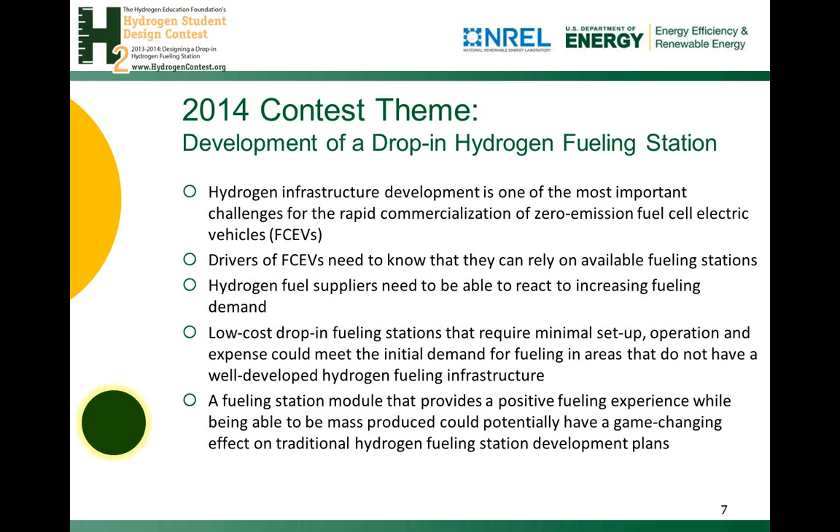One approach is to avoid that early drivers will be limited by range, by the lack of infrastructure, by developing such drop-in fueling stations that allow greater range in areas of low penetration.

So we'll see what drop-in means. It's that stations should be easily transportable to another location once demand in the area is large enough to justify an investment in a stationary fueling station. Furthermore, they should have comparatively inexpensive costs to be built in great numbers and require low maintenance and easy permitting.

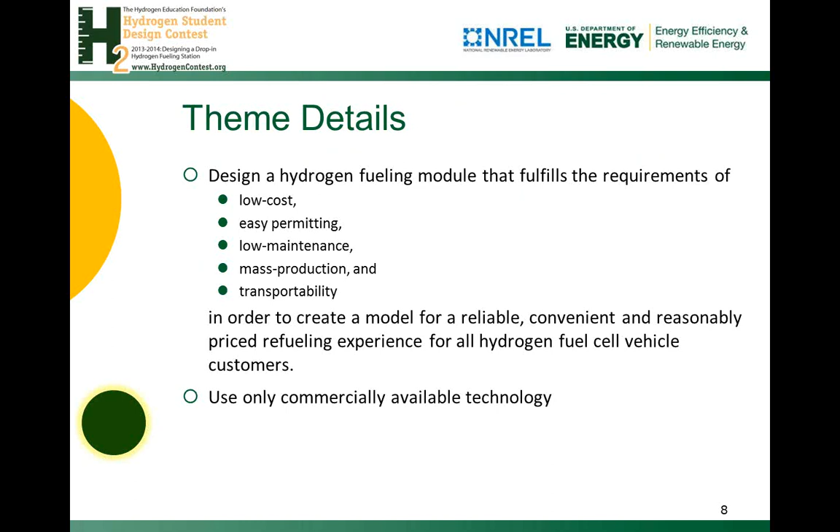And finally, this goes for all of our contests, it's not an R&D contest, so all the components in the design have to be commercially available.

The 2014 contest had 7 sections, which all needed to be addressed in detail. The most important section up front is of course the design of the station. It was supposed to provide 100 kilograms of hydrogen per day and be able to refill at least 6 cars per hour. The system had to either produce the fuel on site or get the hydrogen delivered and then compress it, store it, and dispense it.

It had to refuel vehicles at 700 bar and do so from empty to full in about 5 minutes. The station had to be affordable, requiring standardization of components to allow for mass production and thus economies of scale to kick in. Currently, stations are fairly expensive and mostly custom designed, although recently that has been changing.

Beyond the design components and requirements, teams needed to develop a cost and economic analysis, which includes capital cost, operating cost, information about maintenance cost, and an estimate for the market price for the 5th, 100th, and 500th station.

There's also a safety analysis, which needed to show ways to mitigate risks and list applicable codes and standards, and sections on operation and maintenance, environmental analysis, and customer education and interface design.

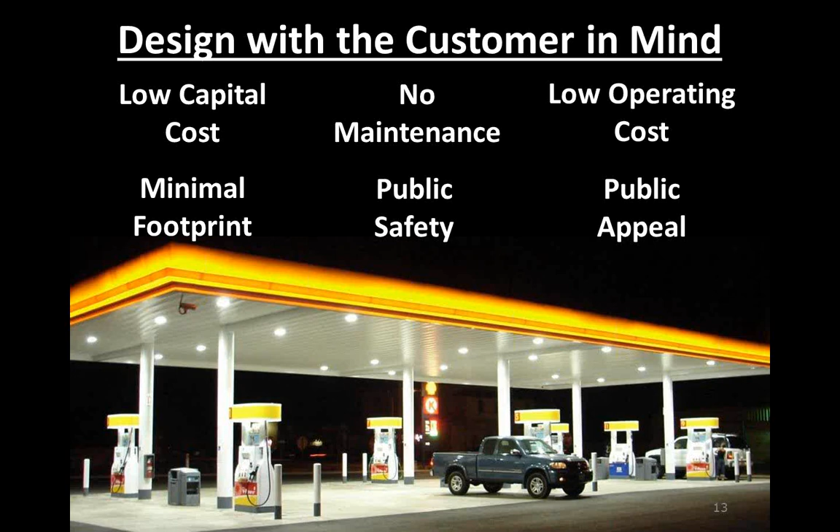The paramount decision in our design was the choice of liquid hydrogen delivery to replenish our fueling station, so that's where I'd like to begin.

We compared on-site electrolysis, on-site methane reforming, gaseous delivery, and liquid delivery based on operating costs, capital costs, transportability, and public impact associated with these technologies as they exist today.

We found that our estimates match conclusions made in a 2013 NREL report that liquid hydrogen delivery has the lowest capital cost for a near-term mass deployment of 100 kilogram per day stations.

We also found that liquid hydrogen is available in most metropolitan areas. In fact, it makes up 80 to 90% of all non-pipeline hydrogen deliveries. So a well-established infrastructure is already in place to supply our hydrogen stations.

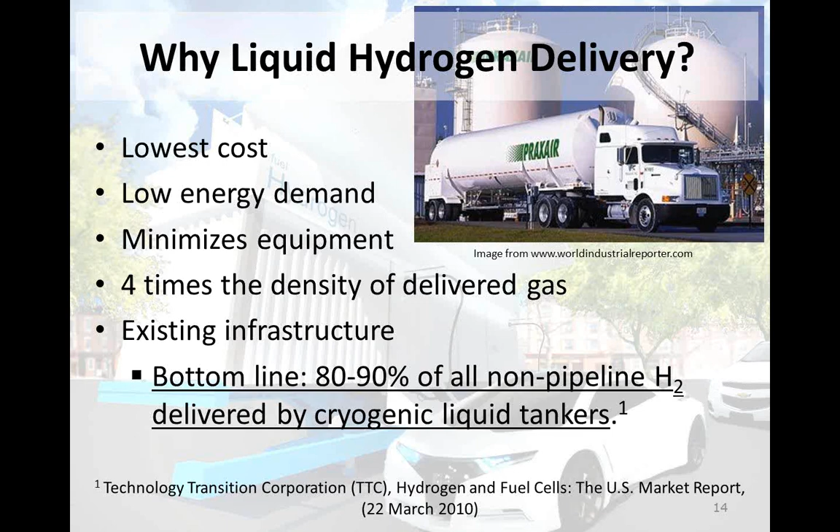So now that I've identified how we plan to get hydrogen to the station, I would like to talk about how we design the station around liquid hydrogen.

These are some of the special considerations for a transportable fuel station that uses liquid hydrogen storage, different than what you'd see for a permanent hydrogen station design. The details of the safety system, design for transport, the liquid hydrogen storage tank, and how the station uses hydrogen boil-off are in the contest report, so I won't go into those details here.

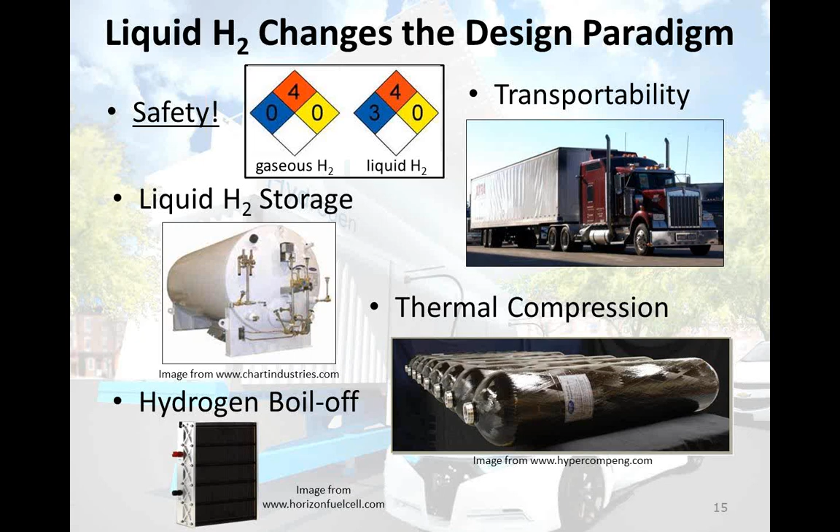What I want to highlight is the thermal compression and how we incorporate it into the design. Thermal compression is the process of using the large temperature difference between liquid hydrogen and the environment to do work. Liquid hydrogen can be converted to extreme high pressure gas in a composite cylinder by allowing it to absorb energy from the environment around it.

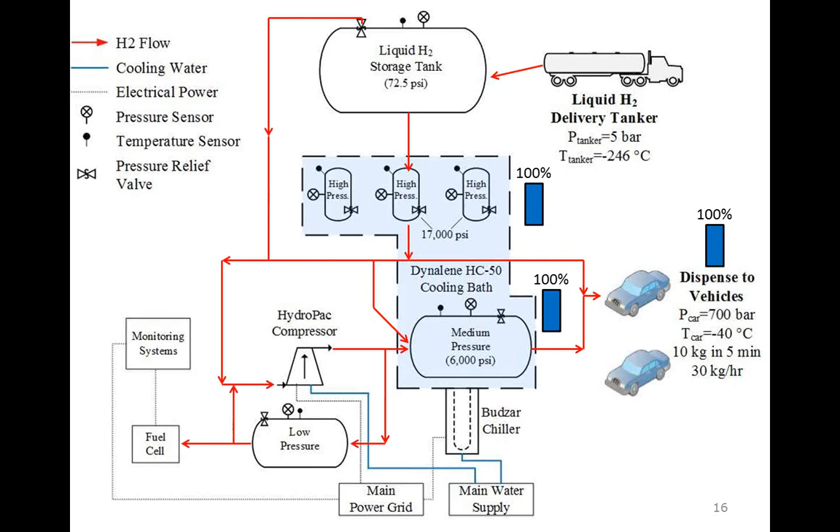That is how the station is designed to operate. Now we'll look at some other features.

This is the remote operator interface designed by team members Simon Guo and Samusam Chanda.

The stations are designed to operate autonomously, but for safety and reliability, a remote operator will monitor each station using the interface shown here. To the left side is the system diagram for the operator's reference. The right side shows sensor readings from the station in real time. Cylinder temperatures and pressures, as well as valve statuses, will tell the operator that the system is working and alert them if conditions exceed design limits or valves are operating out of sequence.

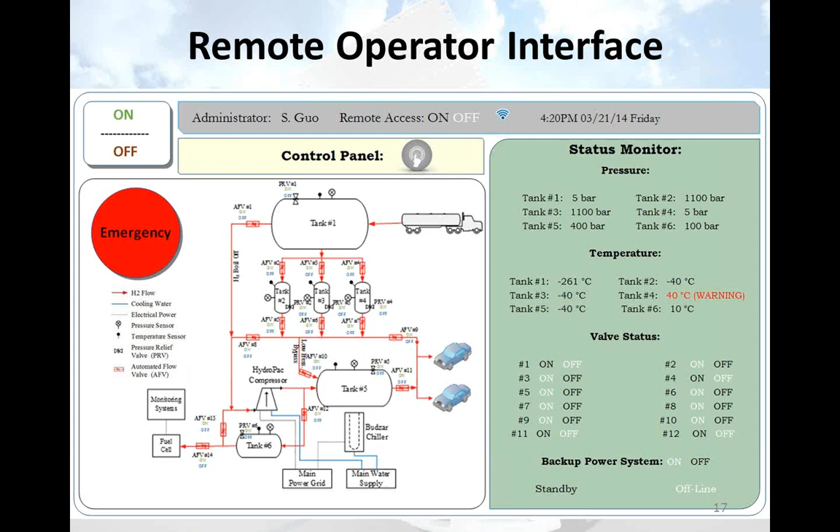If there is an issue with any of the components, such as an overheated tank, a warning message will appear here, shown in red, and alert the operator to check the system and take appropriate action.

Here again, the station is designed to operate autonomously, but interacting with customers via a standard touchscreen tablet computer. The customer interface was designed by team member Patrick Fromm.

Similar to a gasoline station, the user will select the method of payment, and a brief instruction on the nozzle operation will appear. The customer will be able to instantaneously monitor the fuel level and cost of the transaction.

If at any time the customer has a question or is concerned about system safety, the information tab allows for a live video chat with the remote operator and has the option of activating emergency shutdown procedures.

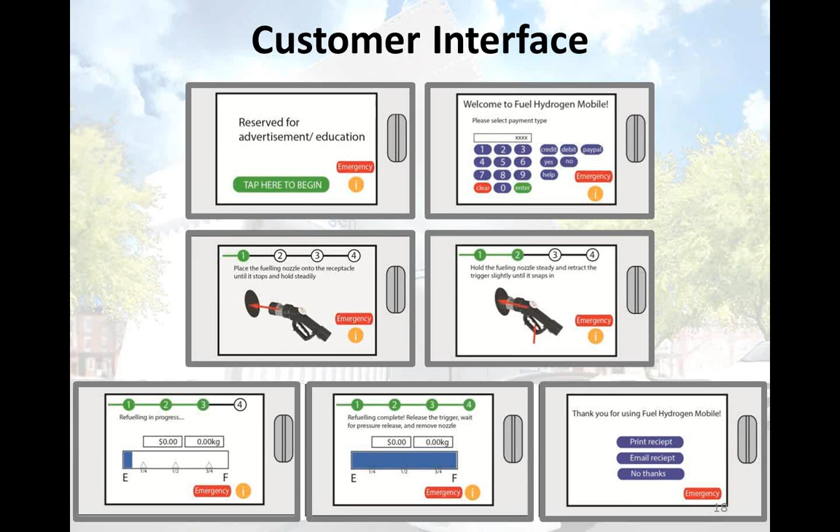This system has been designed to be as safe as practically possible. Each tank is fitted with a pressure relief valve to ensure they do not overpressurize. The trailer is ventilated with industrial fans to prevent any appreciable concentration of hydrogen within the container.

The system will be continuously monitored in real time by remote operators, and fuel cells provide power to emergency and monitoring systems in the event of main grid power failure.

The container is outfitted with state-of-the-art fire suppression and emergency warning systems to alert the public, local authorities, and the remote operators in the event of an emergency.

If all other systems fail, the container is outfitted with an explosion relief panel to direct any explosion in a safe direction away from people and property.

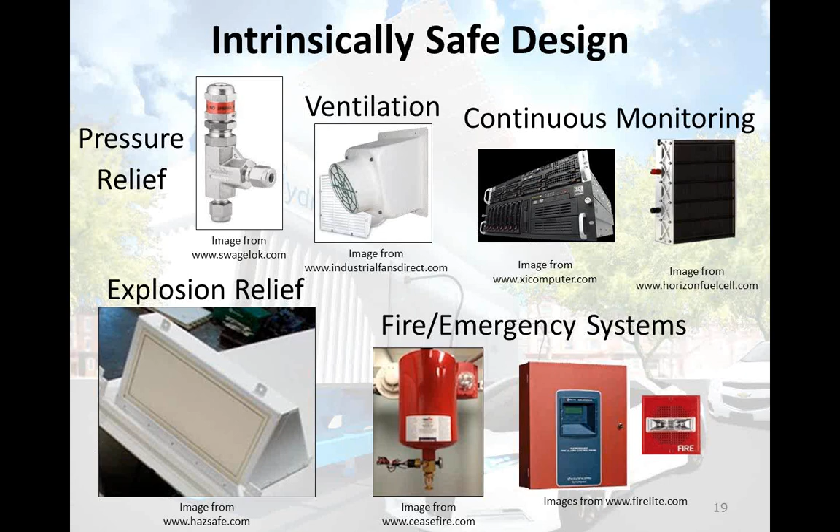Part of this contest was to find an actual location for the station and determine the necessary permits and regulations that would need to be followed. Miko McFeely and Brian Billow were the two primary members that worked on the siting and permitting.

For simplicity, they sited our station on the Washington State University campus in the same parking lot as the motor pool gasoline pumps. This design meets all the applicable national fire codes and regulations for the selected site.

All the mechanical and electrical components are located at one end of the trailer away from the hydrogen to further increase the station's safety. The steel container walls are also lined with 2-hour fire-resistant panels to reduce the setback distances required in the NFPA codes.

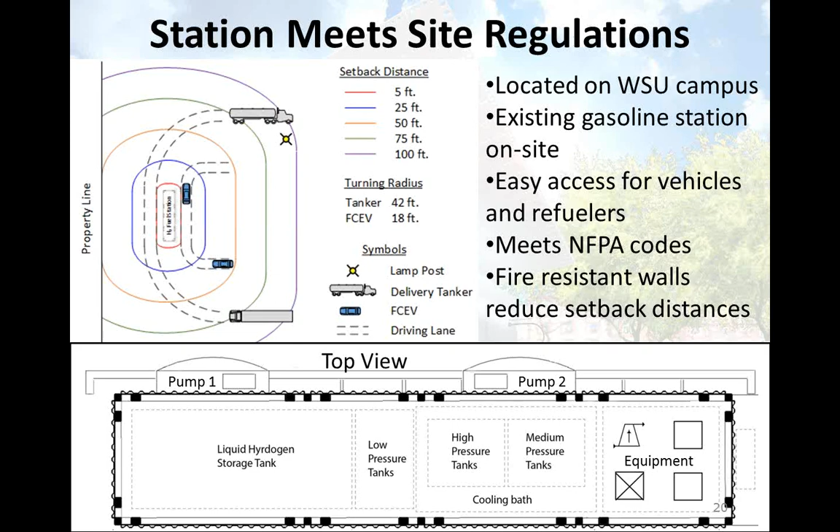By reducing those setback distances, we increase the number of possible site locations and make it more appealing to the customers.

And the monthly expenses including electrical power, cooling water, and maintenance. Note that we have not included the cost for a remote operator or the man-hours required to assemble this system. Our economists used this information to develop a fuel price model, which was simplified in terms

of the required rate of return of the owner and the demand for hydrogen in kilograms per month. We used this model to analyze how fuel prices varied with the changing monthly demand and the required return.

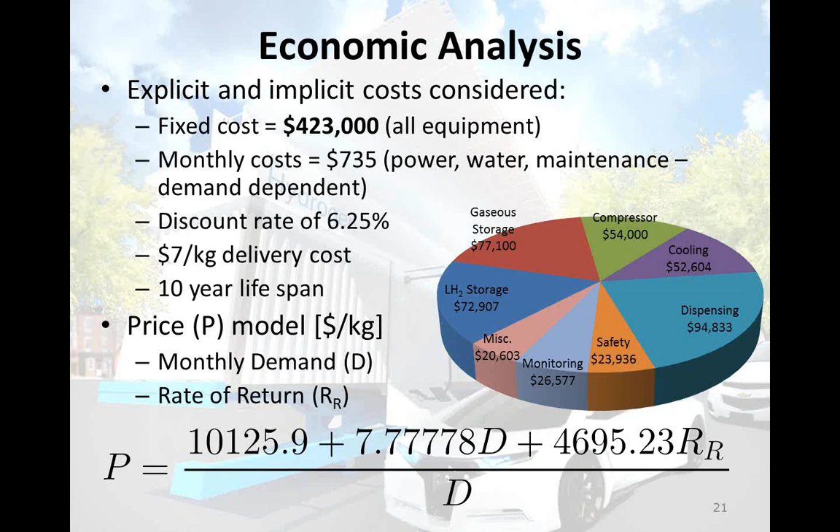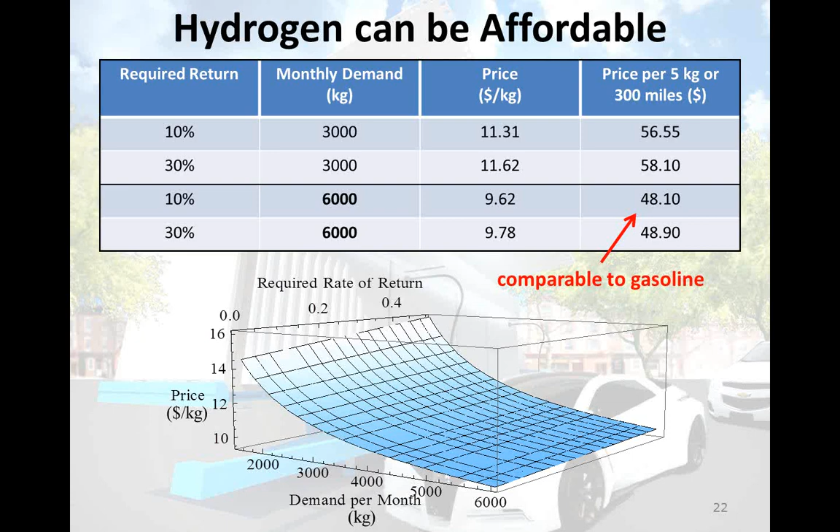These results show that a station servicing just 40 vehicles per day, which equates to 6,000 kilograms a month, can dispense fuel for $48 per 5 kilogram fuel tank, which has a range of roughly 300 miles. This is equivalent to a vehicle that gets 25 miles per gallon at a gas price of $4 per gallon.

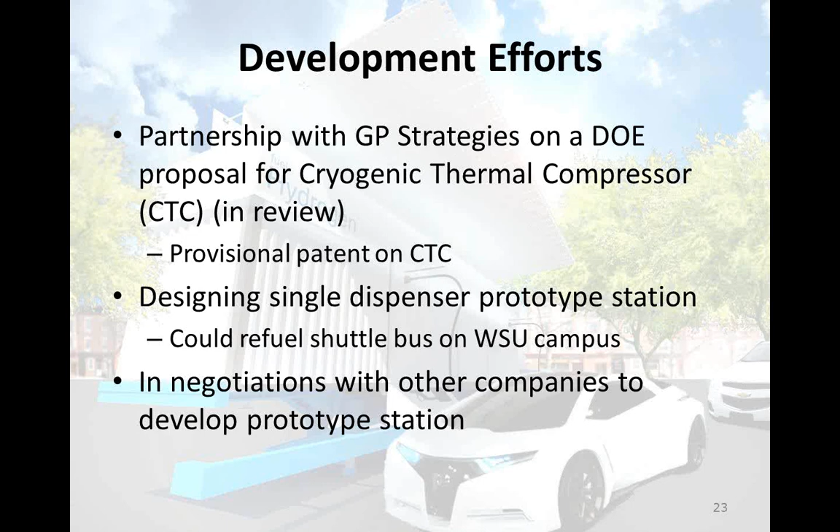Since presenting our design for the competition back in May, we have been working to get a prototype developed and funded. We have partnered with GP Strategies on a DOE proposal to develop the cryogenic thermal compressor, which is the key compression and energy-saving portion of this design. We are also designing a smaller single dispenser prototype station that would potentially be used on the WSU campus to fuel a new university shuttle bus. And we're also in negotiations with a couple other companies to develop a prototype station that could be used for mass production to support the initial hydrogen vehicle rollout.

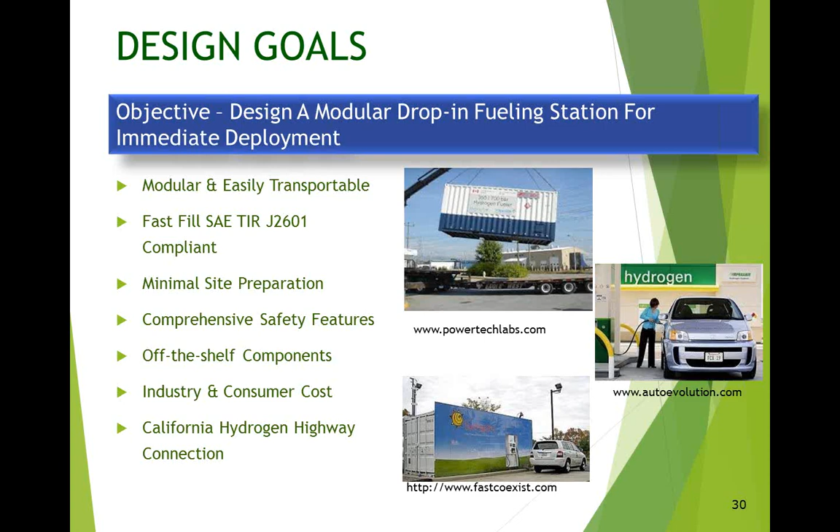We also wanted to consider that not every location would be suitable for delivery. You may be near a pipeline, or you may want to produce the hydrogen on site using an electrolyzer. So with minimal modifications, the station could be used in any of those situations. Next slide, please.

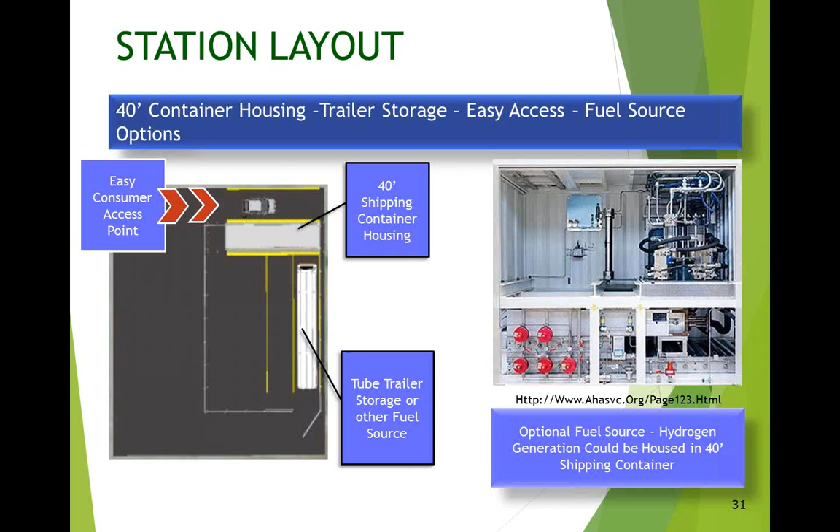Gas is delivered in a compressed hydrogen tube trailer. The gas is then compressed and cooled through a cascading storage and delivery system on an as-needed basis. The compressor necessary to raise the gas to the appropriate pressure for the cascade cooling system has a minimum inlet pressure of around 100 bar. In order to maximize hydrogen extraction from the tube trailer, we use a two-stage compression system with a low pressure compressor and a high pressure compressor.

Next, the cascade cooling system is stored at -10 degrees, and the gas is cooled inline from the cascade storage system to the dispenser to -40 degrees before it is dispensed to the hydrogen vehicle. Next slide, please.

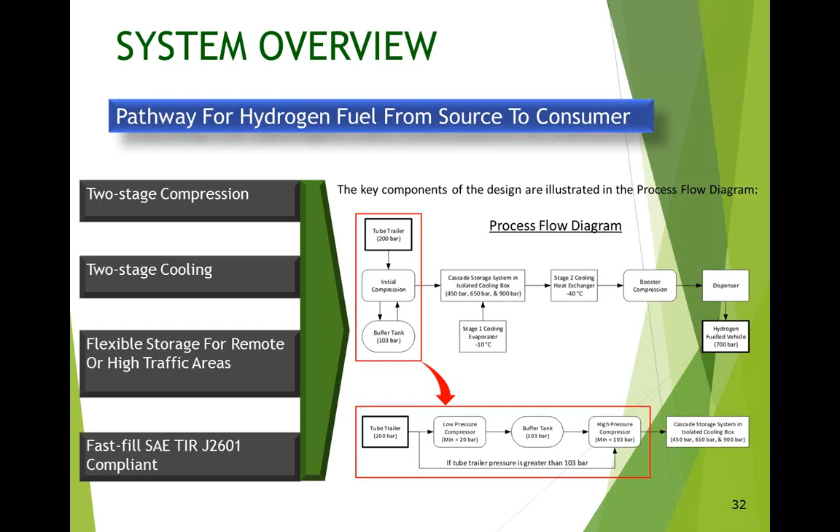Here you see a system schematic showing the basic flow route and compression and storage throughout the system. It starts with the two-stage compression that Julian was just speaking of from the trailer, which maximizes the source use. Then it travels to a cascade storage system.

Thanks, Andy. This is Matt. So the purpose of the cascade storage system is to optimize compressor efficiency, since there's no point in compressing all the hydrogen clear up to 900 bar except when needed. So for partial fills and early parts of the fills, the lower pressure tanks would be used, and the higher pressure tanks would be exclusively for the higher pressure top-end fills.

Also, what the cascade system allows is, as the hydrogen is depleted from the lower pressure tanks and the higher pressure tanks are moved on to, the tube trailer compressor can begin to fill the lower pressure tank so that it's prepared for the next car when it arrives.

Thanks, Matt. Cooling for the system takes place in two stages. The cascade storage system is housed in a refrigerated box, basically a small box inside the station that's well insulated, and this box is maintained at negative 10 degrees. That allows you to cool it to negative 40 relatively easily using a second stage for the cooling system.

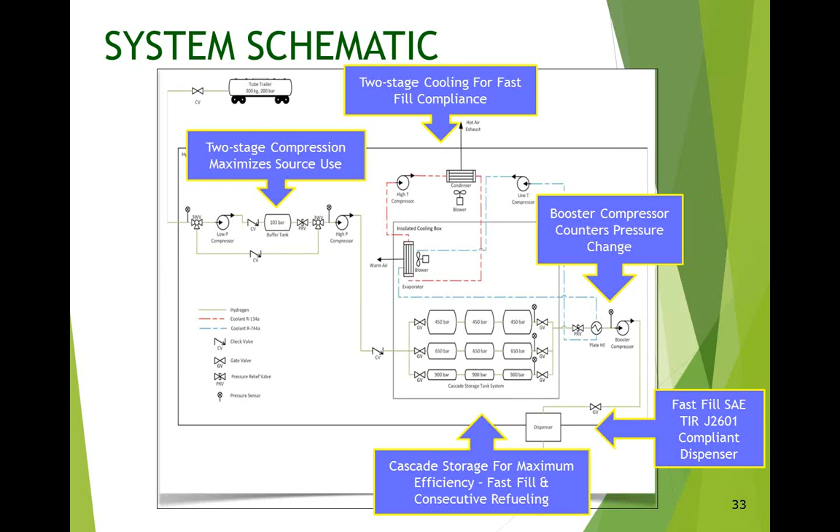This would then travel to the dispenser for fast fill dispensing, and there's also a booster compressor in the system in the event that there's any pressure differences. Next slide, please.

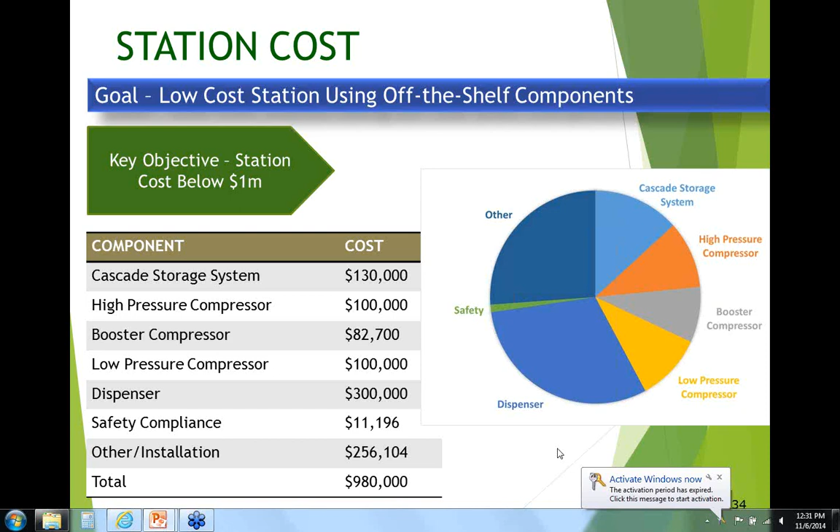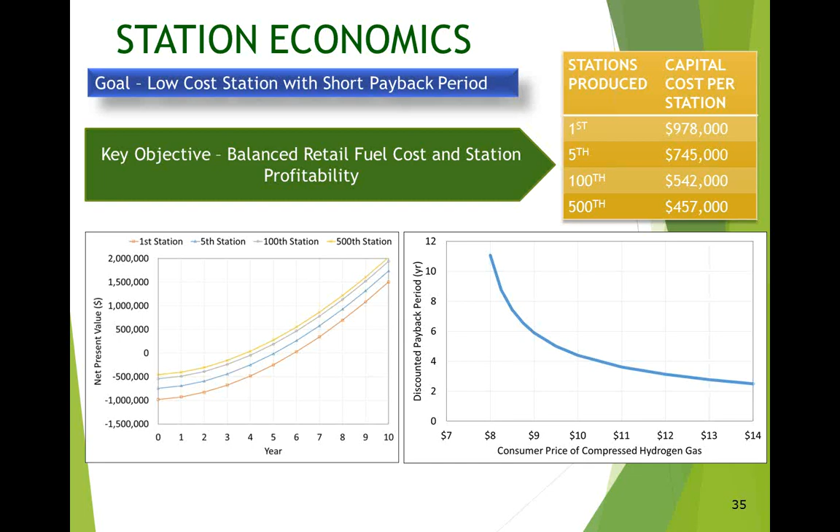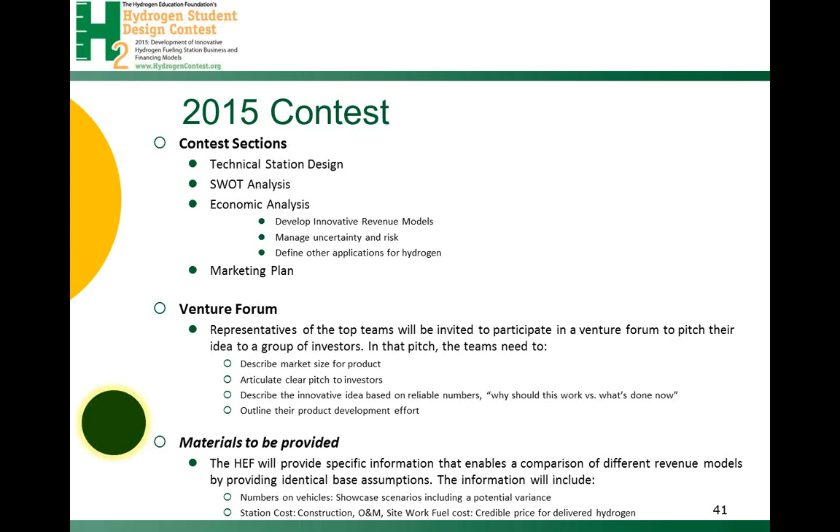We'll have more information once the contest is officially launched. So check the website, hydrogencontest.org. Sign up for our news lists or subscribe to our Facebook page to receive timely information on the launch and other information. Now finally, the proposed timeline sees a December 8th early registration deadline and the January 16th final registration

and abstract deadline, and the final business plan submission deadline of May 4th. We hope that this allows the student teams to finish their plan before the weeks of finals, and the investor forum then will be about the beginning of June and the final award ceremony after that.